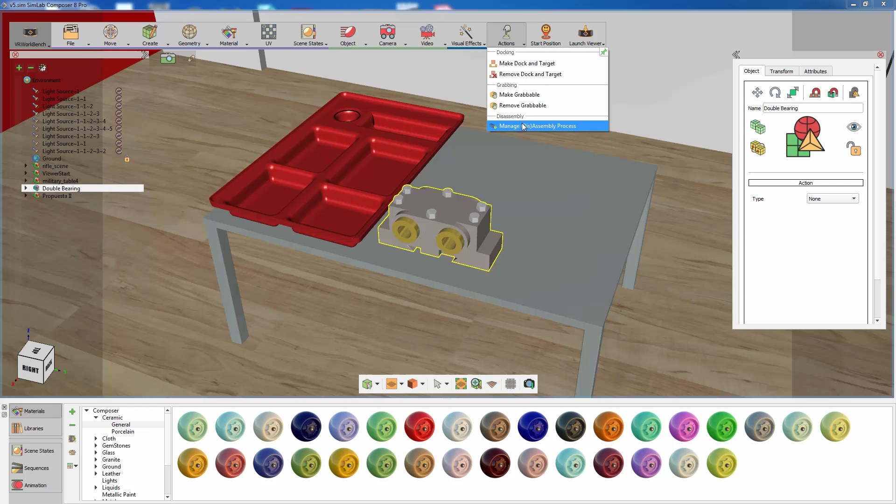In the Assembly Management window, you can graph and connect nodes based on the order you want them to be disassembled in. To disassemble the double bearing design, we need to start off by removing the bolts.

Select the first bolt parent from the object tree or from the 3D area and click on the Add Assembly Node icon. A node for Bolt 1 will be created in the assembly graph.

Select the second bolt and click on the Add Node icon again. Notice that the second bolt node was connected under the Bolt 1 node, indicating that the second bolt will be available for disassembling after the first bolt.

Click on an empty area in the assembly graph to deselect the current node, then add another bolt to the graph. The newly added bolt has a separate representative node that is not connected to any other nodes, since it has been created while no other nodes were selected.

To connect the stray node to other nodes, select it first and then click on the parenting icon, then click on a node to attach it to it. Proceed by adding all the bolts to the assembly tree.

After connecting all the bolts, the next part is connecting the top cover of the bearing assembly. Select the cover and add it under the bolts.

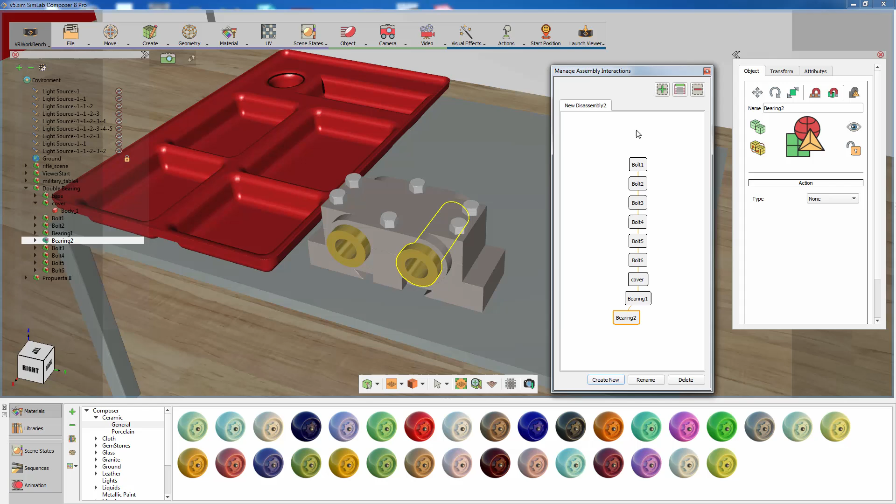The last part in the assembly is the base of the bearing, which we are going to leave out of the assembly, since it will serve as the main node for this assembly tree.

Go to the Launch Viewer menu and click on Start Desktop Viewer. In the desktop viewer, use the mouse and the arrows on your keyboard to navigate and walk around the scene.

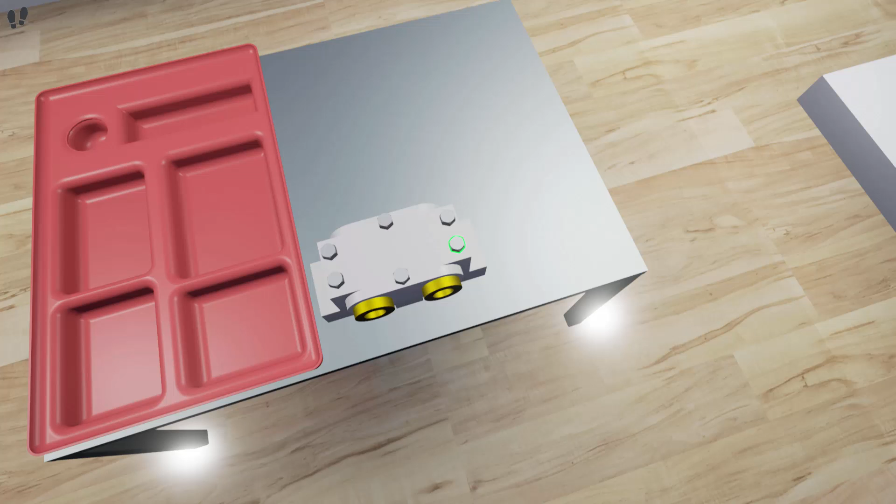Press H on your keyboard to toggle the hand. Use the mouse wheel to extend the hand and reach out to the outlined object in the assembly. The green outlined object in an assembly refers to the currently available part of the system that you can remove.

Once the hand intersects with the outlined object, hold right-click and move the mouse to disassemble the held part. Upon releasing the right-click, the bolt will be placed in the last position you had it in.

The next available part in the assembly will be outlined in green. Move the hand towards the next part and hold right-click to remove it.

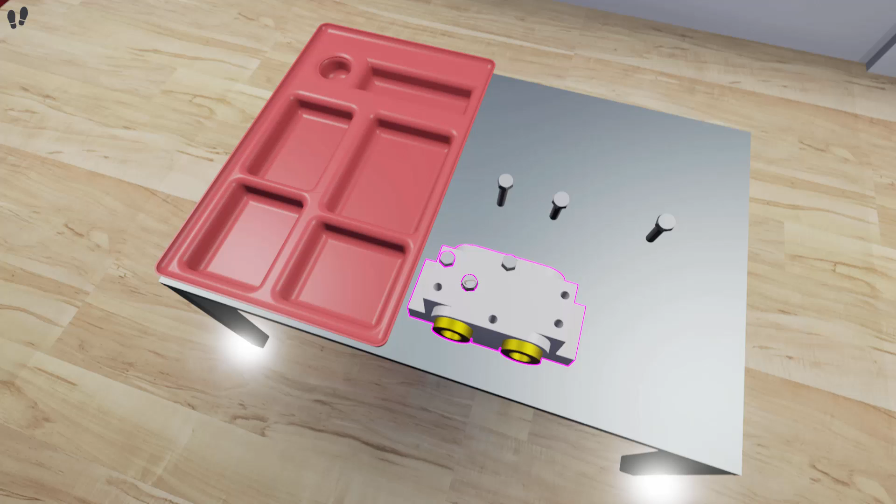Notice that the last part you removed from the assembly is outlined in yellow, indicating that you can also interact with it. Hold right-click on the yellow outlined bolt and place it on the main assembly, then release it to place it back where it was.

The assembly system allows you to work both ways, where you can either disassemble or assemble the parts of your design.

Press Escape on your keyboard to exit the desktop viewer and go back to SimLab Composer.

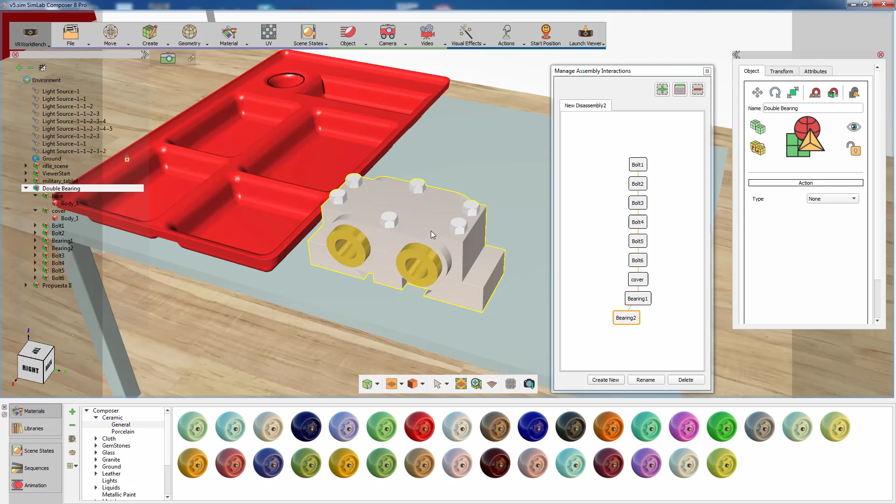Another useful feature that synergizes greatly with assemblies is docking systems. Docking allows you to place movable objects in a certain predefined manner upon interacting with them.

Go to the Actions menu and select Make Dock and Target. Select the tray and click on the green mark to set it as the docking station.

Then select a part of the assembly, for example the bolt, and click the green mark to confirm that this is the target of the docking system.

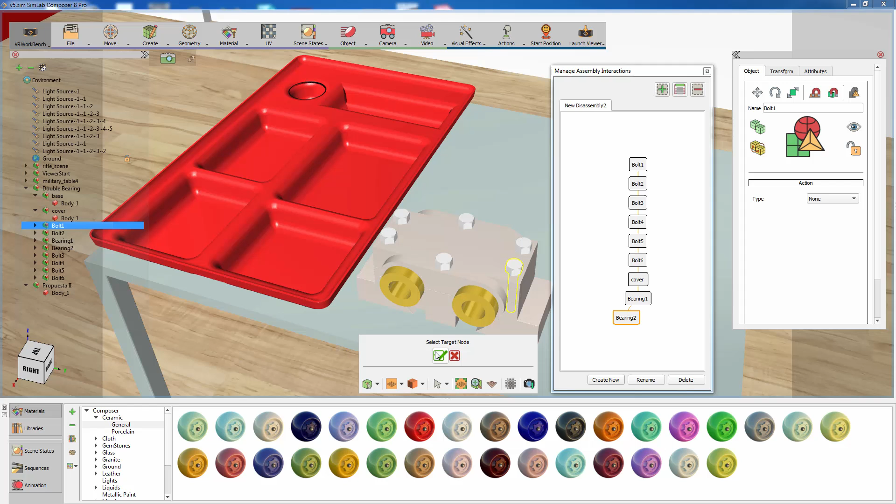Now position the selected bolt on the tray as if it was placed there. Now click on the green mark to confirm the position of the bolt while it's docked.

Go to the Actions menu again to create another docking system for the second bolt. Set the tray as the dock.

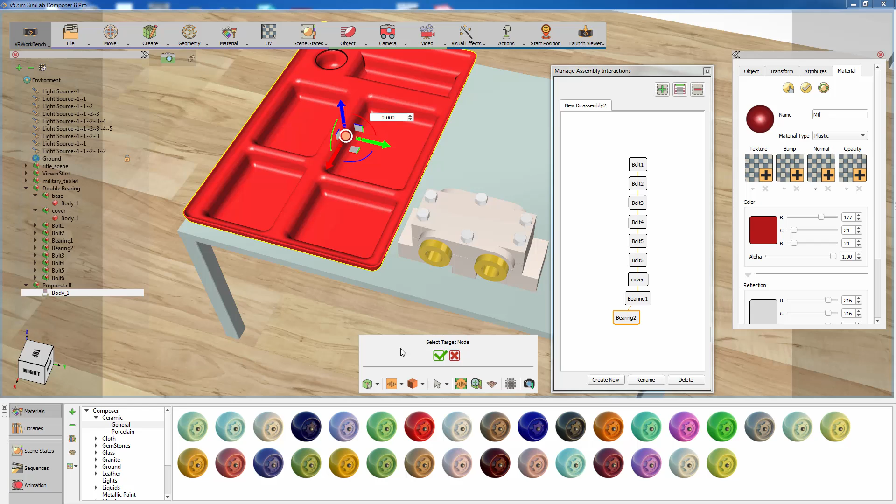Then select a different bolt and place it on the tray. Then click the green mark to finish the dock creation.

Follow the same steps to attach all the assembly components to the tray.

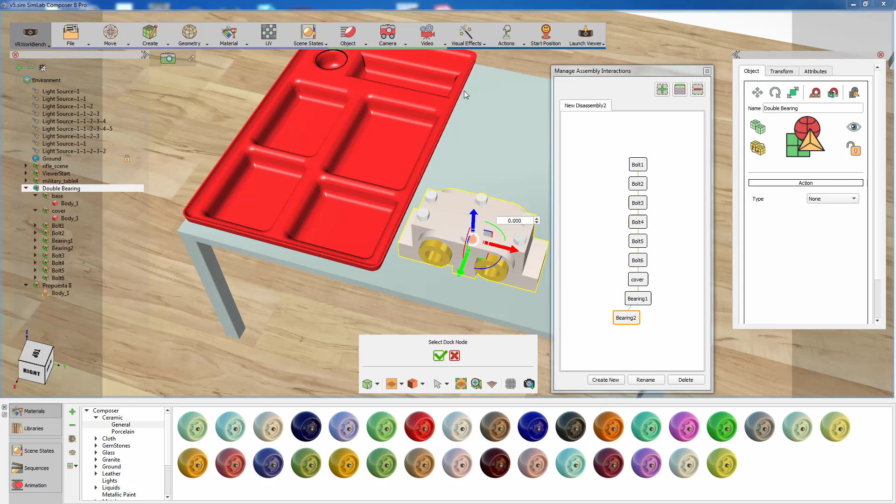In the VR viewer, notice that the tray is outlined while you are grabbing parts of the assembly, indicating that you can interact with them.

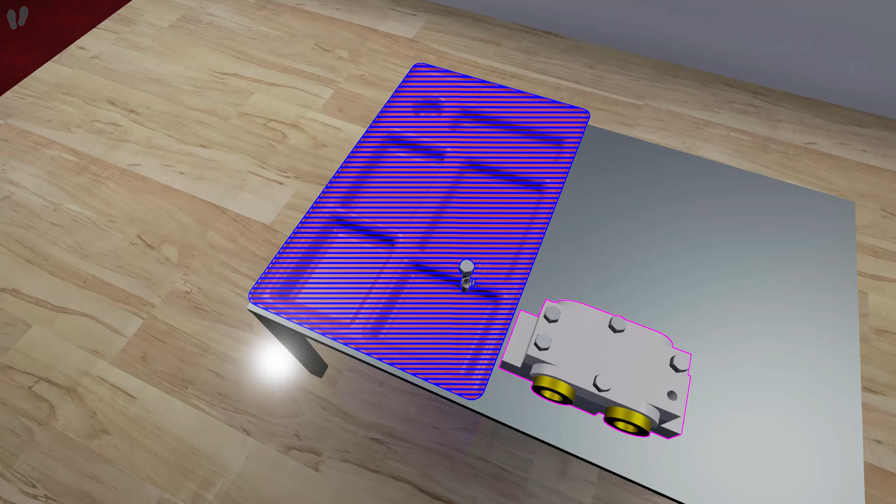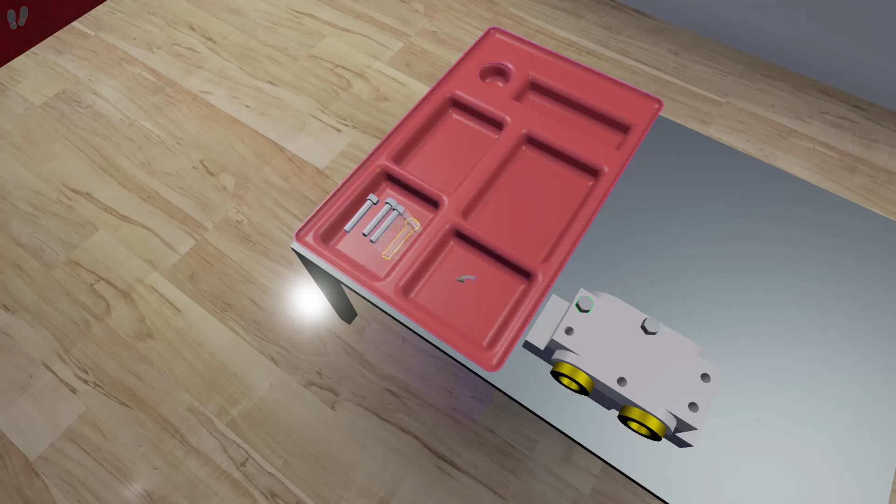Place a component on the tray and release the trigger to place it on the tray with the same position and rotation that you set for the component while creating the docking system.

The assembly and docking systems in SimLab Composer offer you a great method to interact with components in your design. It allows you to clearly demonstrate the steps of building a mechanical assembly in a simple yet effective manner.